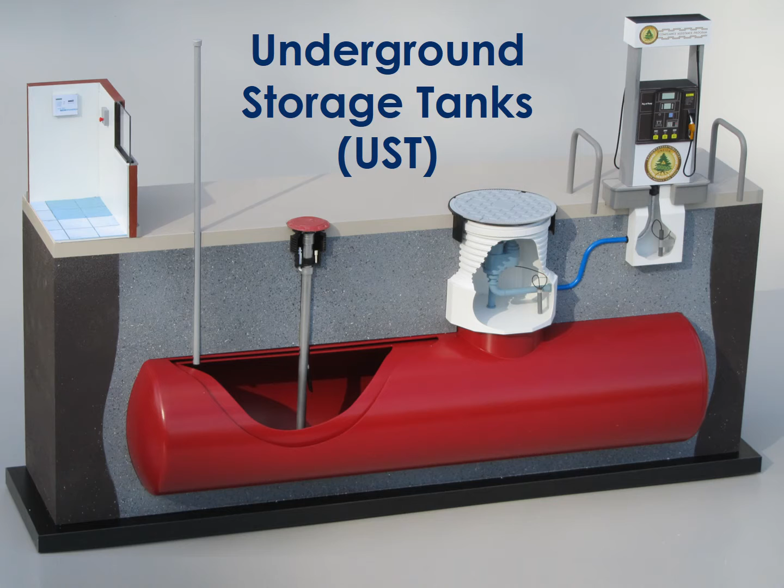A UST facility consists of many components that we'll discuss in this training, the most obvious being the tank itself, which most are double-walled, to catch and contain a leak that would otherwise go straight into the ground. For New Hampshire residents, more than 60% of us use groundwater as a source of drinking water, so it's very important that we keep the lands and waters as clean as possible.

The general areas of the UST system start at the fill riser, where product is delivered to the tank, the vent riser, which guides vapors out, and any piping that allows product to be moved from the tank to another destination, like a dispenser at a gas station, for example. A non-dispensing facility would be a heating oil system, where the pipes lead to the boiler room furnace. Regardless of its use, the piping system also consists of one or more containment sumps that allow these components to be accessible at ground level while also containing any leaks that might happen at these locations.

Most UST facilities have a monitoring system. Some are electronic and use sensors that are placed around the tank and the pipes, and they sound off an alarm when something is wrong. The operators would then respond to find out what the alarm is for, do some sort of action to fix the problem, or relay the message to someone that will. We'll discuss all of these in further detail. In this training, we'll also discuss other forms of protection, like corrosion protection. Depending on the equipment at your facility, the compliance rules vary.

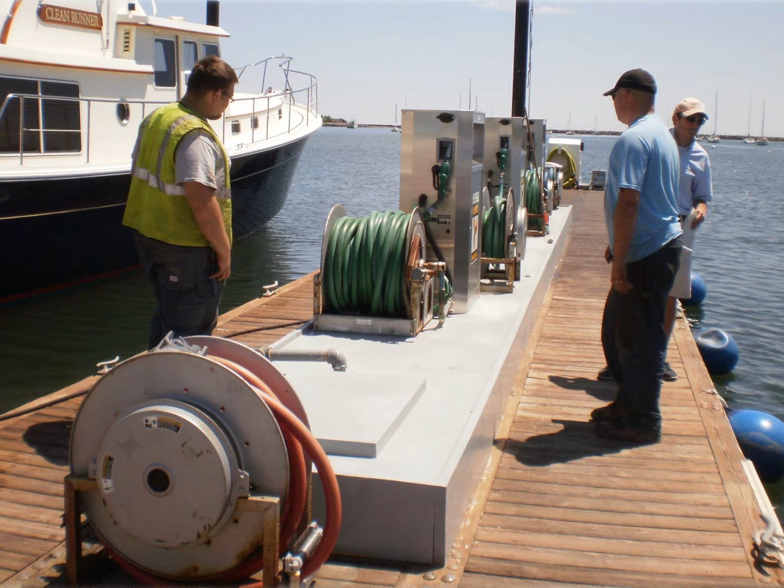To assist owners and operators in the variations across the state, we have split the training into two types of certifications, one for dispensing facilities, like gas stations, airports, and marinas. The other exam offered with this program applies to non-dispensing facilities, like those who use heating oil, like hospitals, schools, corporate buildings, and the like. For those of you who plan to take the non-dispensing exam, you will not be expected to view the vapor recovery presentation. However, all other topics do apply.

The training requirements differ amongst the three classes of operators, so in a moment I'll review each one individually so that you can decide which role fits you and what you need to do after your training, like what documents are needed to meet the requirements. Some documents need to be sent in to NHDES, and others need to be posted at your facility. I'll also review the options for recertification, which must happen within 2 years from your certification date, and in what instance you may have to repeat your training sooner. And lastly, I'll guide you through the basics of inspections. There's a 3-year state inspection, and there's a monthly checklist that must be done by the operators.

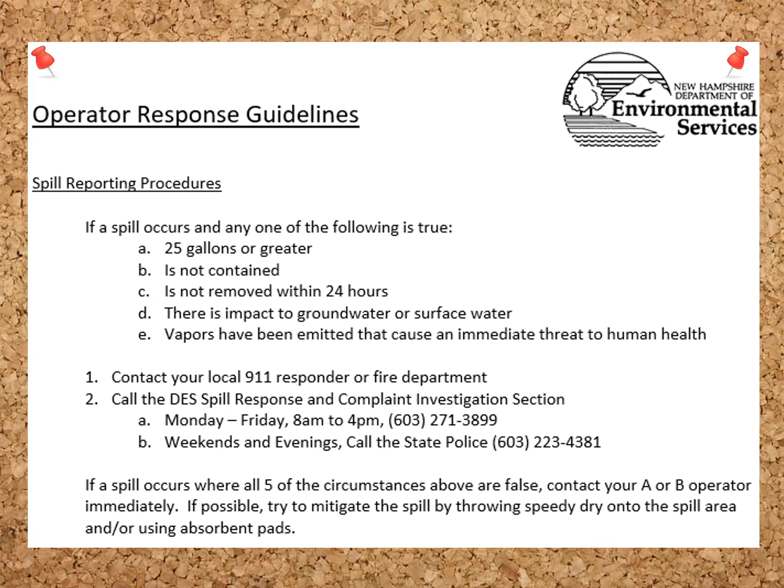Another document that's required for operator training to be posted at your facility is the response guidelines. These vary from one facility to another, so I'll share the basic requirements of what has to be put on the document, and the rest you can write according to your own procedures. The RSA states that this document shall at least include reporting procedures, contact information of who you want your operators to contact in the event of an emergency, and details of how you want them to handle faulty equipment or how to handle an emergency. All of these training-related documents have been made available to you in the materials section of the online test, as well as on our website.

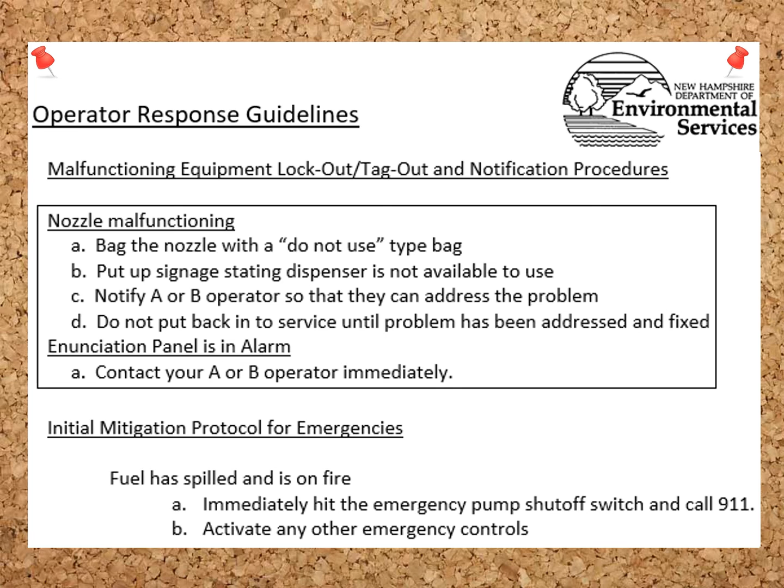Upon passing your training program, your certification will expire in 2 years. This limit applies to all 3 levels of operators. To see what's available for recertifying, look on our website for the most current list of approved training programs and a schedule of upcoming exams or classes.

For those of you who have a good understanding of the UST rules and training requirements, there is an option to take just the recertification exam. Operators must study on their own. This option is only available for operators with facilities that are in compliance. Otherwise, this option will not be allowed. We strongly recommend that you participate in the online option or attend a training session so that you can learn about what has changed over the past 2 years.

If NHDES determines that a facility is not in significant compliance with the applicable state rules and statutes, then we will direct the Class A and B operators to repeat their training. Within 30 days, they would need to be retrained and recertified in accordance with an approved training program, or declare another operator. In either case, a statement of training form must be sent in again.

Federally regulated facilities must be inspected every 3 years. They are witnessed by a state inspector, but are completed by someone of the owner's choosing, either by someone on site or with the assistance of a hired contractor. These inspections are announced beforehand, so you can coordinate your schedule with that of the inspectors.

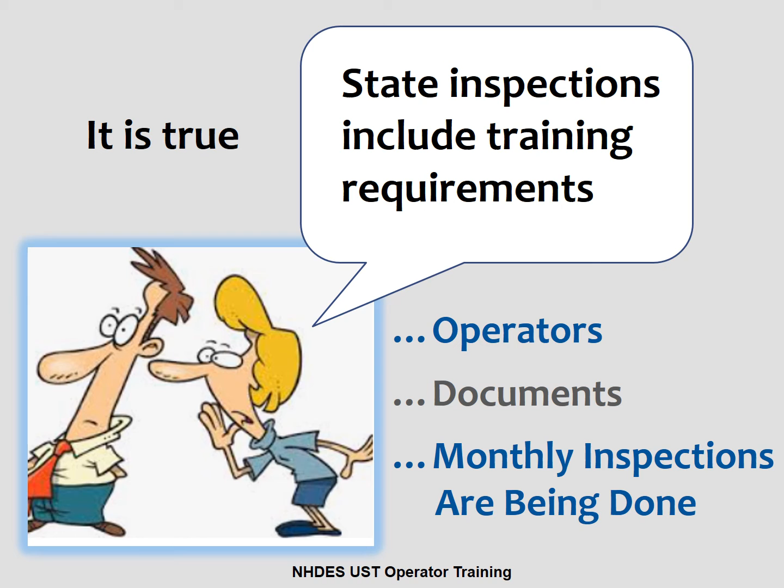Operator training requirements are a part of your facility's compliance. During the state inspection, the inspectors will verify that your operators hold a current certification, that your documents were submitted to us to designate your Class A and B operators, that other documents are posted, like the Class C operators or the spill response guidelines, and the inspectors will review your monthly visual inspections.

This is the monthly visual inspection. It is a 2-page form. It is the responsibility of the Class A and B operators, but they can designate it to someone else and record the names on the form if you do. This does not alleviate the responsibilities of the Class A and B operator, so make sure you are clear about the details in which these inspections are completed. If anything is found wrong during the inspections, record that on the form and have it corrected within 30 days. Make sure you retain these forms for a minimum of 3 years.

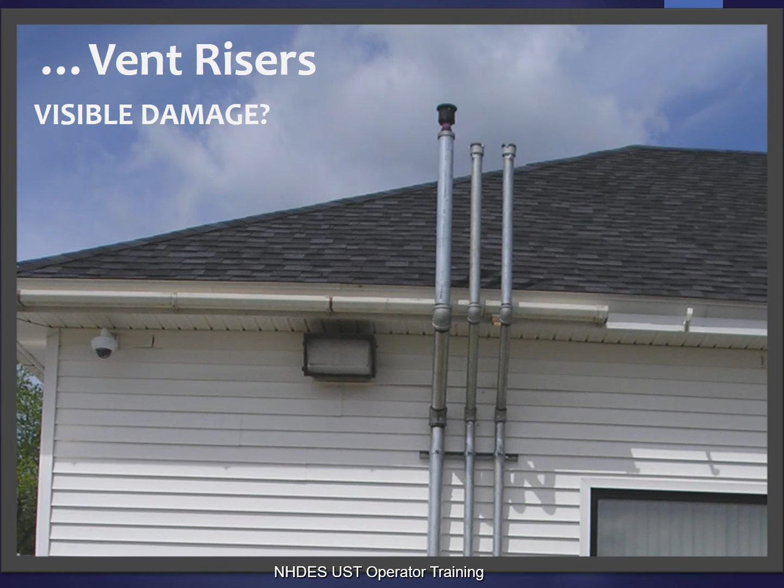Most vent risers are metal pipes above ground, but fiberglass underground. So the riser being bent this far over likely has a break in the fiberglass and would vent flammable vapors out at ground level. Doing your monthly inspections, you can catch obvious issues like this and hopefully prevent a disaster from happening at your facility.

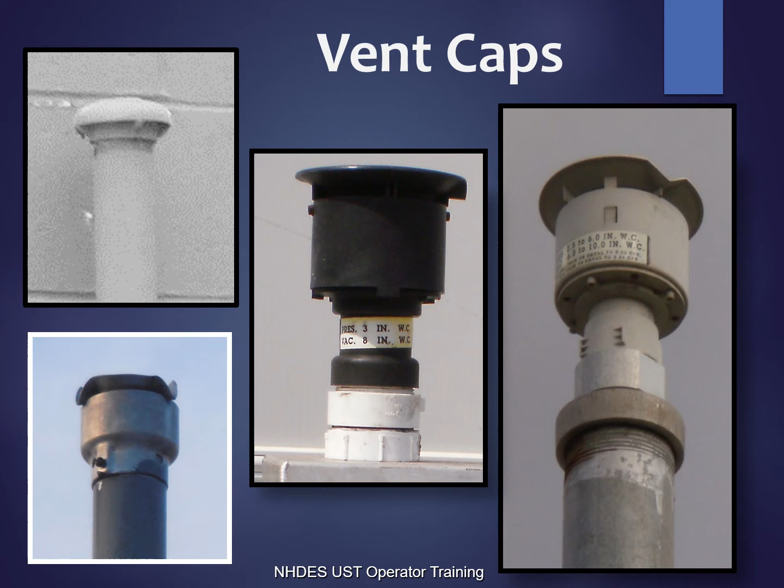These signs can easily be recognized at ground level. When checking your vent caps, you'd be looking for visible damage like the cap on the left, which is missing the top lid. Heavy storms can result in damage like this, so it's important that you have it fixed when you notice it and record the work on your monthly form.

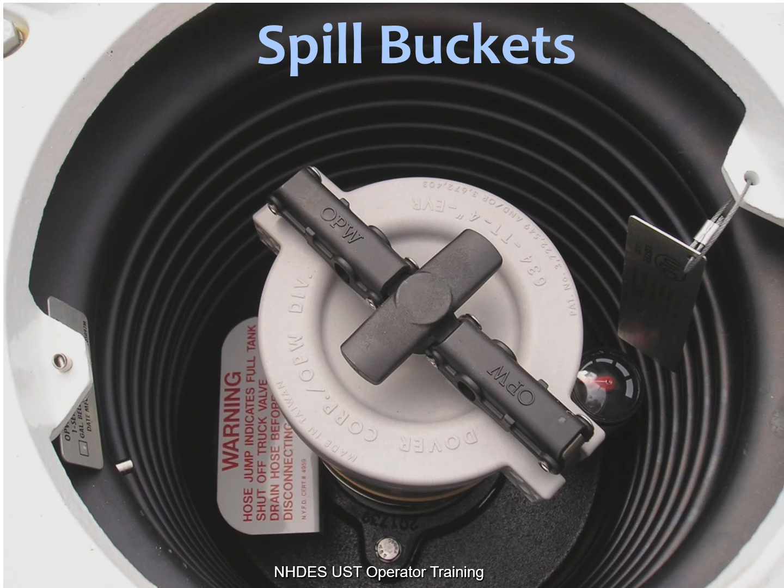As for spill buckets, this is what you'd see when you take off the ground level cover and look down. Underneath the gray cap is the fill riser, where the delivery driver connects their hose to the fill adapter to fill your UST with product. The spill bucket is designed to catch and contain any drips or spills that may happen during the delivery process.

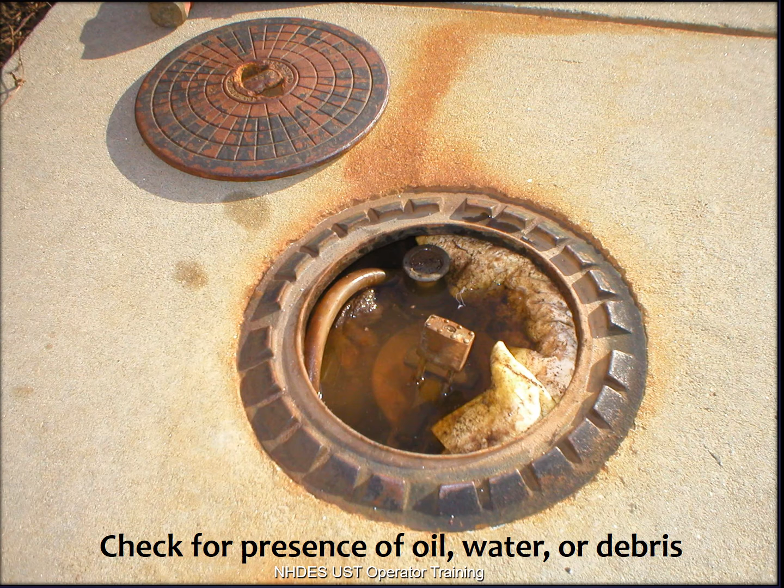Check your spill buckets for the presence of oil, water, or debris. This photo is not what you want to see on your monthly inspections, but if you do, then you'll have to get it cleaned out. Remember to wear gloves when cleaning out spill buckets. Use nitrile gloves instead of latex because they can provide the protection you need against petroleum products.

Do not use a shop vac to take out the liquids. They can spark and could be dangerous to use with mixtures that may contain flammable liquids. You can use a hand pump or a cup and some rags. They'll work equally as good. Please note that the water should not be dumped onto the ground. It must be disposed of properly.

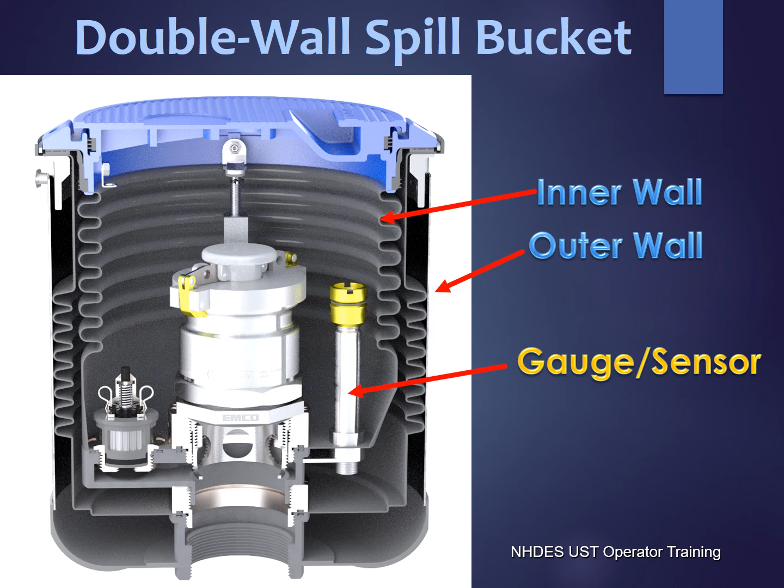This image shows a cross-section of a double-walled spill bucket that shows what it looks like on the inside. You can clearly see the separation of the inner and outer wall and the gauge that would indicate whether there's any liquid in the space between the double walls. More and more facilities are installing double-walled spill buckets, so if you have this at your facility, it also needs to be part of your monthly inspection.

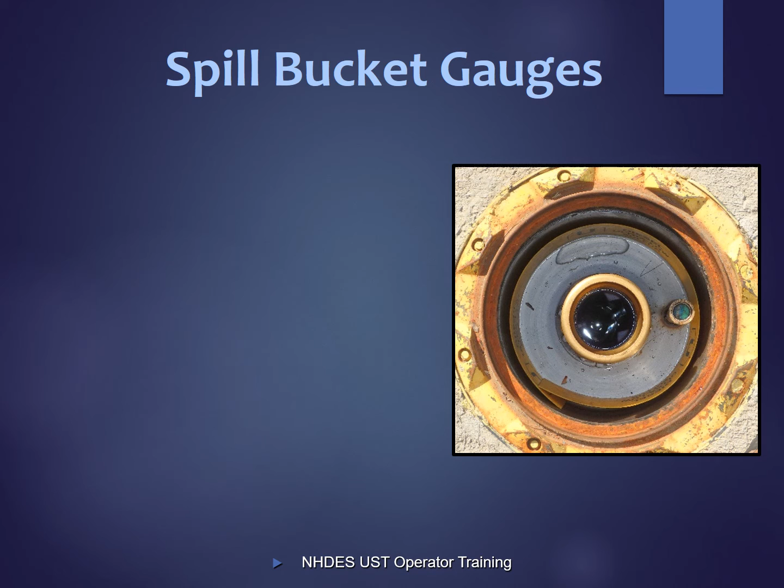Gauges for double-walled spill buckets are located off to the side of the fill riser pipe. Some have color indicators that change from green to red when there's a presence of liquid within the double walls. Others have a simple level gauge to let you know the amount that's in the space of the double walls, if there is any. Whichever you have, keep the dirt off the top so it'll be easy to read the indicator. Double-walled spill buckets with gauges that are not indicating a presence of oil or water, or electronic sensors that are not in alarm, would mean that you are potentially exempt from the triennial tightness testing requirement.

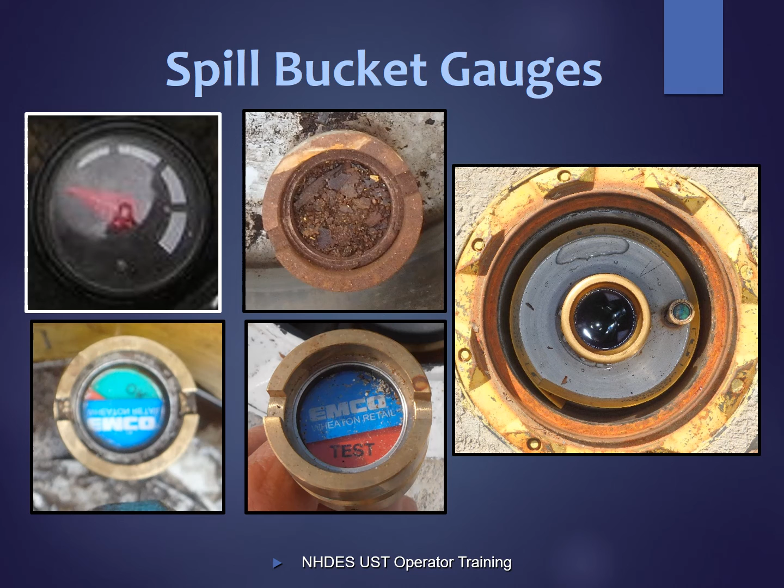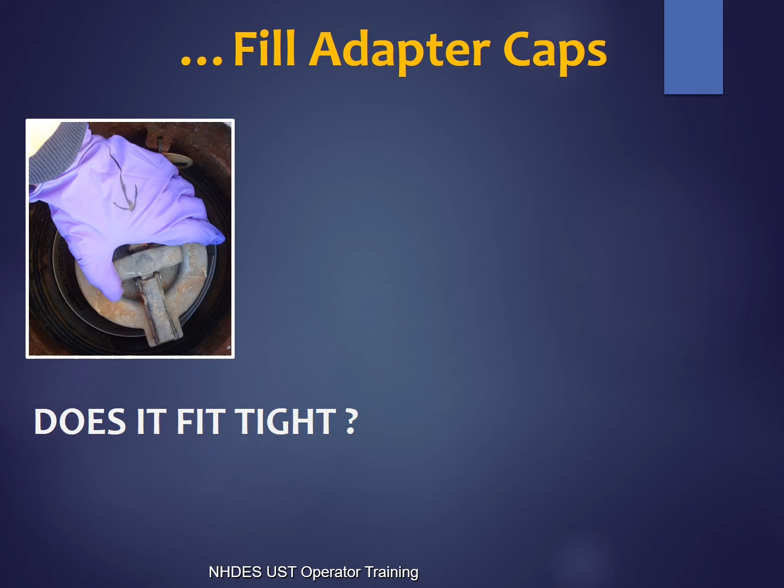When checking your fill adapter cap, first you want to check to make sure that it is a tight fit. Just give the cap a wiggle and make sure it doesn't move freely. Then take the cap off and look underneath to make sure the gasket is there and in good condition. For heating oil, with caps like this, which is smaller, they would thread on, but you could check them just the same.

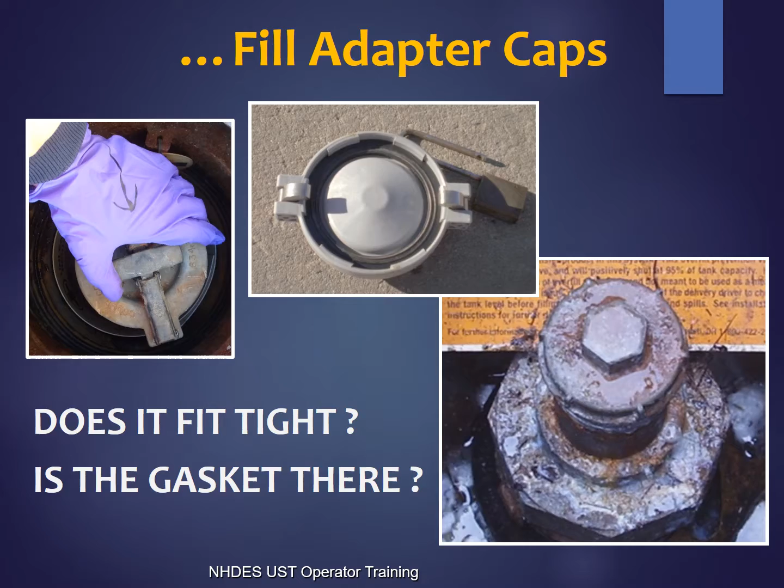Within the spill buckets and under other small ground level covers, the fill adapters are the places where the delivery driver connects their hoses to your UST system. The photo on the left shows a fill adapter, where product would be put into the tank during a delivery. Fill adapters are also connections where vapors can be collected out of the system during a delivery, as shown on the photo on the right.

This is a poppet valve, also known as a dry break adapter. The poppet is a part of the vapor recovery equipment, a requirement at gasoline dispensing facilities, something another presentation will explain. But for the purposes of your monthly inspections, if you have this equipment, you want to give it a wiggle and ensure that it's threaded on tight.

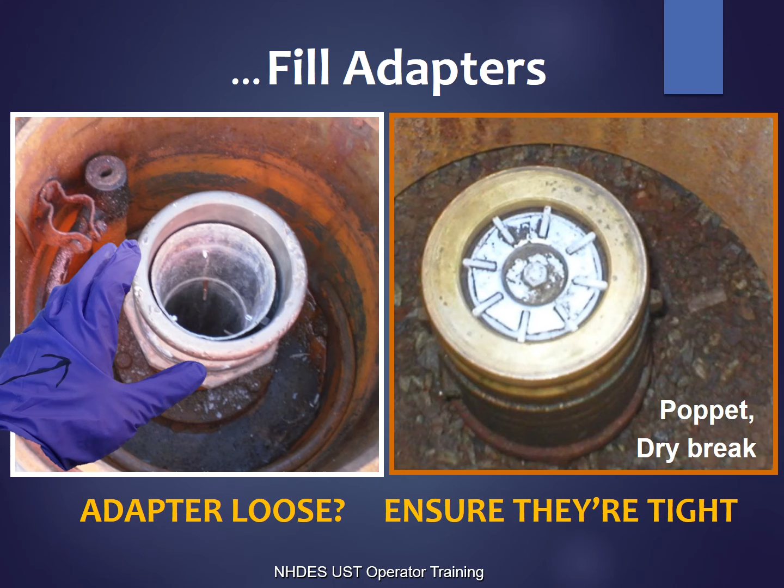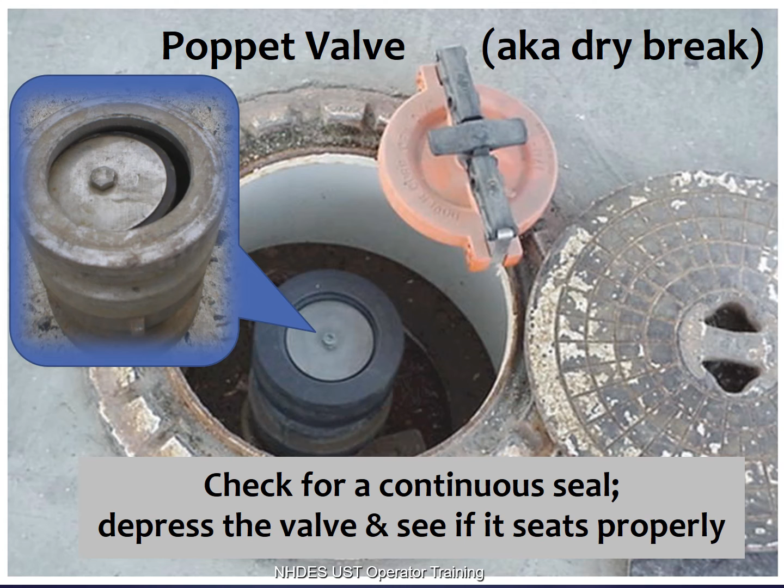When delivery drivers connect their hoses to poppet valves, the elbow connection equipment pushes down on the center of the valve and opens the pathway for vapors to be taken out. During your inspections, check for a continuous seal by pressing down on the center. A puff of air may come out, so try not to breathe it in. What you want to see happen is that it pops back up into place and seats properly. If the spring inside is broken, it will tilt to the side like what's shown on the photo on the left. You can clearly see the valve has a gap and will not contain vapors in the UST systems and could let water in.

Check for obstructions in the drop tube like this. If an inventory stick is left in there, it will interfere with the overfill protection devices installed in the tube. At times, errors can be made, but checking for things like this on a monthly basis, you can catch issues before they become a problem.

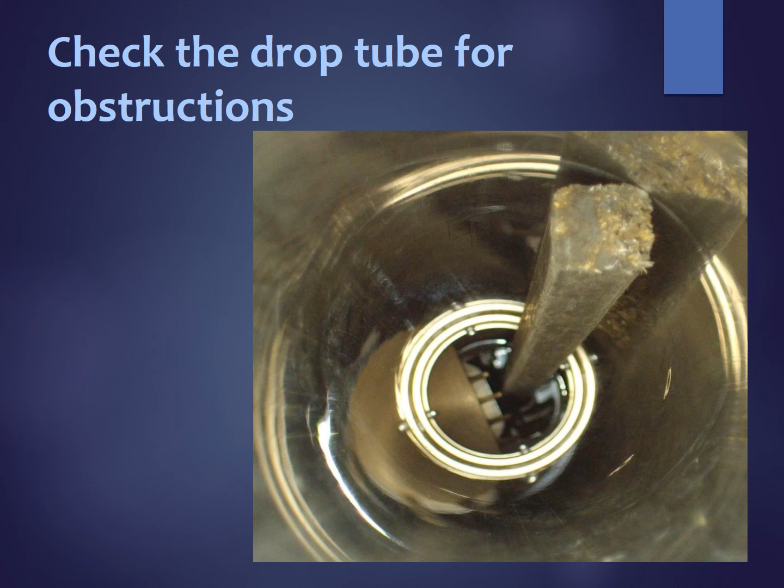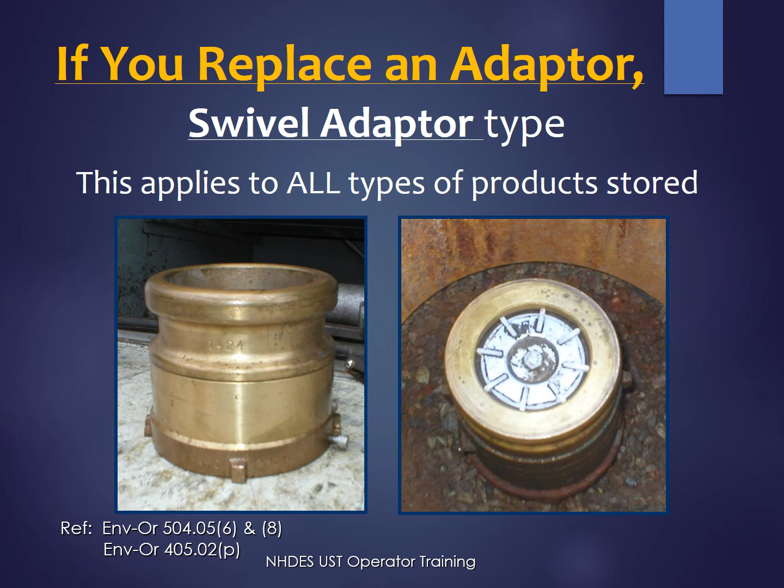At the time of replacing your fill adapter, it is a requirement that it be replaced with a swivel type. This has a top part that turns freely without unthreading the adapter from the riser pipe. This requirement applies to all types of regulated products, so whether you store heating oil, diesel, kerosene, gasoline, etc. With older styles of adapters, they can get unthreaded and wiggle loose over time with the processes of a delivery, as hoses are dragged around and equipment is connected on and off.

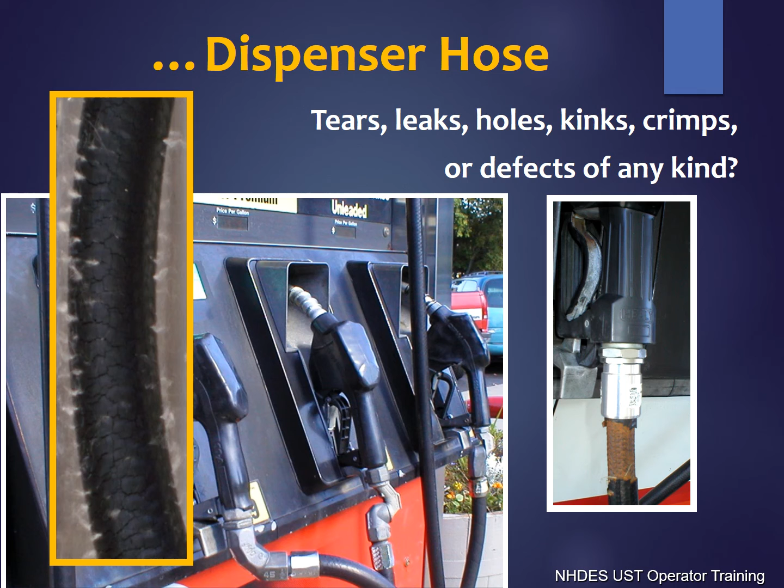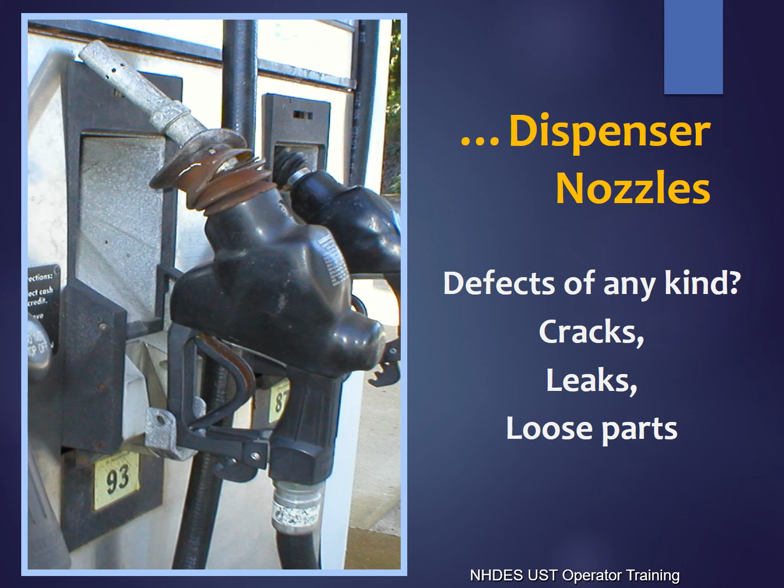Annually, every year, you want to open the covers to your dispensers and look around inside for any signs of leaking, whether water is collecting, or if there's debris. Of course, you would note on the form how you addressed any issues, but definitely make sure you record the date of this annual inspection so that you won't miss the date you need to do it the following year.

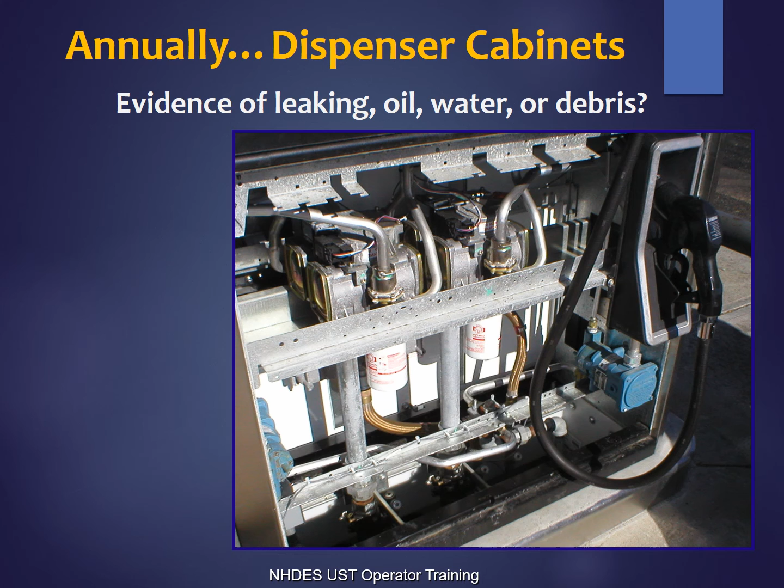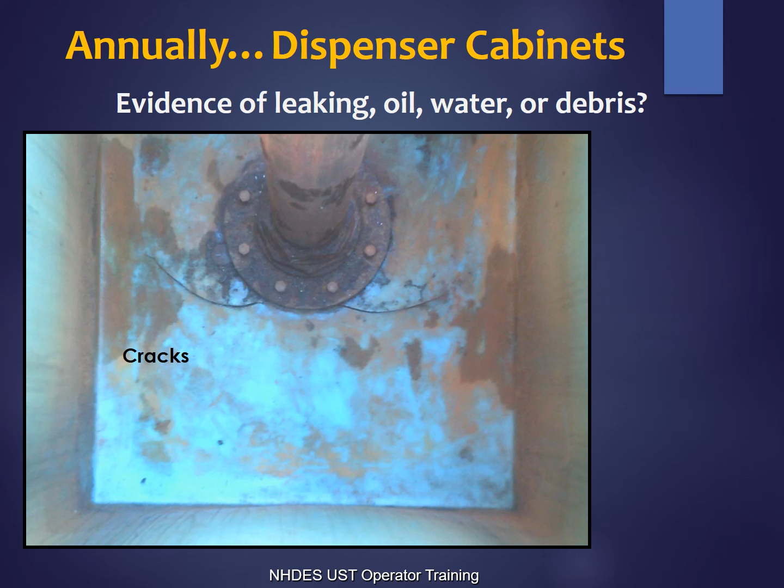When you look down into the containment sumps, where the piping goes underground, look for any cracks in the base and the walls of the sump. These are areas that are designed to catch and contain any leaks at the dispenser, so you certainly wouldn't want any cracks to let out product or let in any groundwater that could corrode the metal parts of your dispenser, causing you to have to replace the equipment sooner than you normally would.

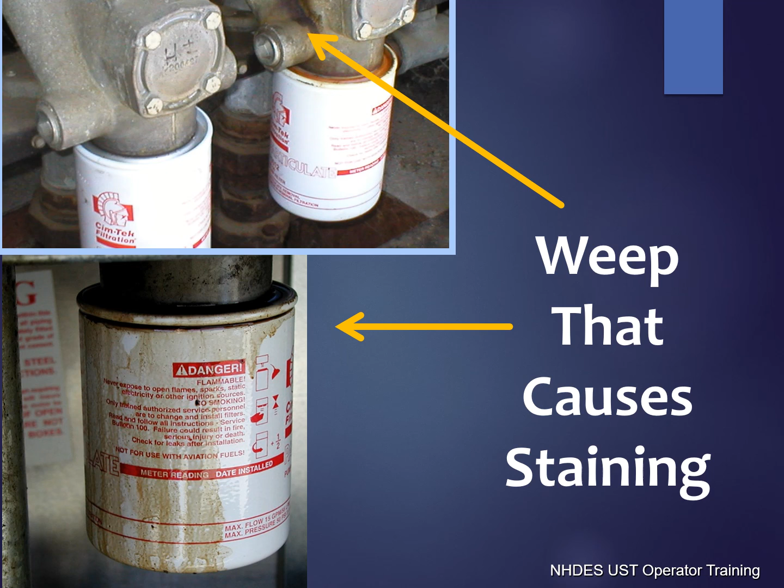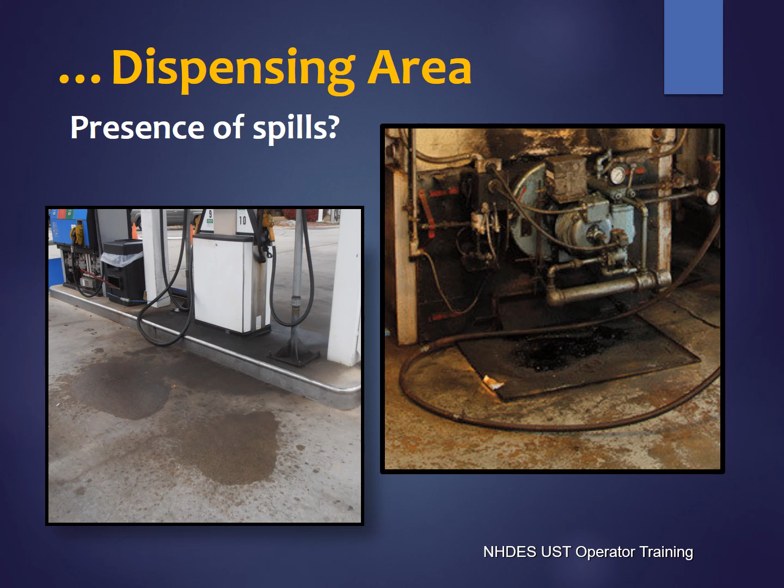If your facility has positive limiting barriers, PLBs, which are the grooves in the pavement designed to catch and contain a spill that happens at ground level, then you don't want to see any cracks because they will not be able to contain any liquid. Also with PLBs, be aware that when replacing hoses, the length of the hose must be considered because they cannot extend beyond the barrier.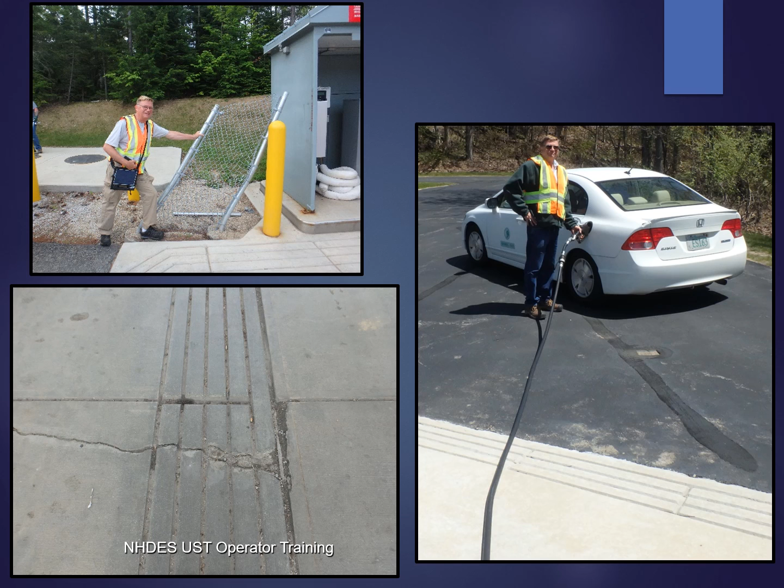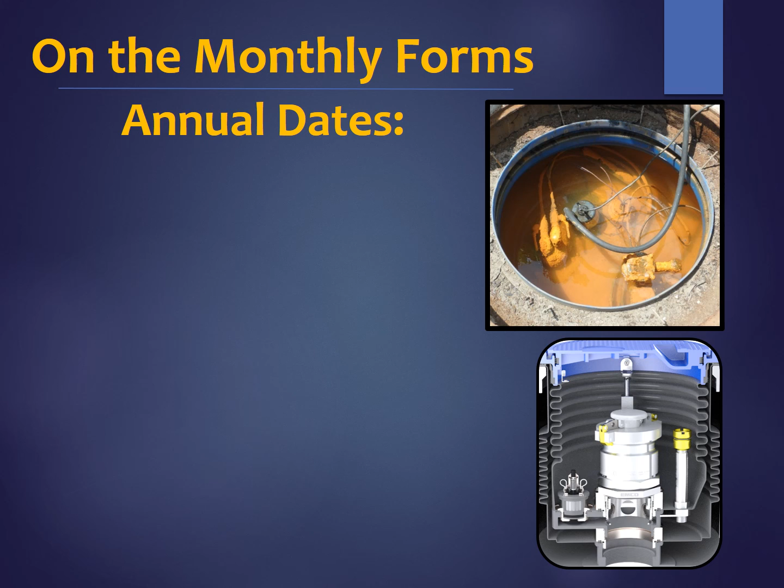There are additions to the new monthly inspection forms. Now you can record the date of things you'd check on an annual basis. These include checking the containment sumps once a year, whether piping sumps or dispenser sumps. You'd want to check for leaks and that they are free of liquid, unlike this top photo, which shows the sump full of dirty water; this would have to be addressed.

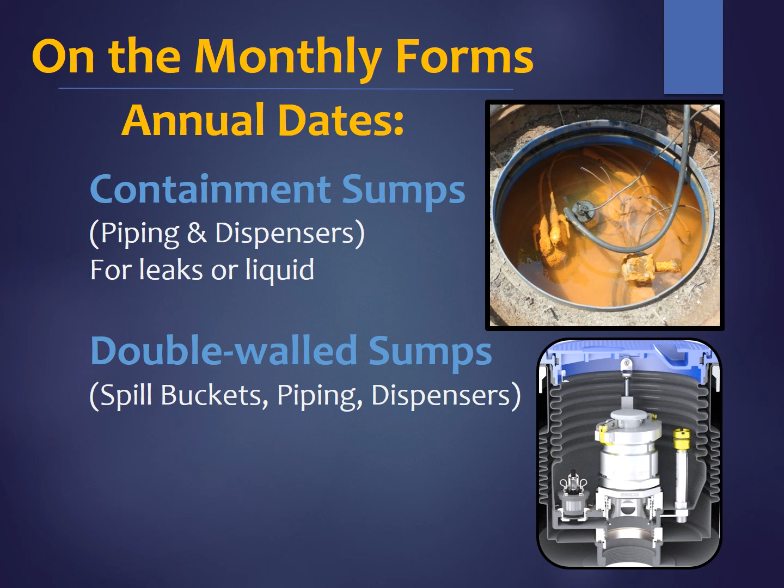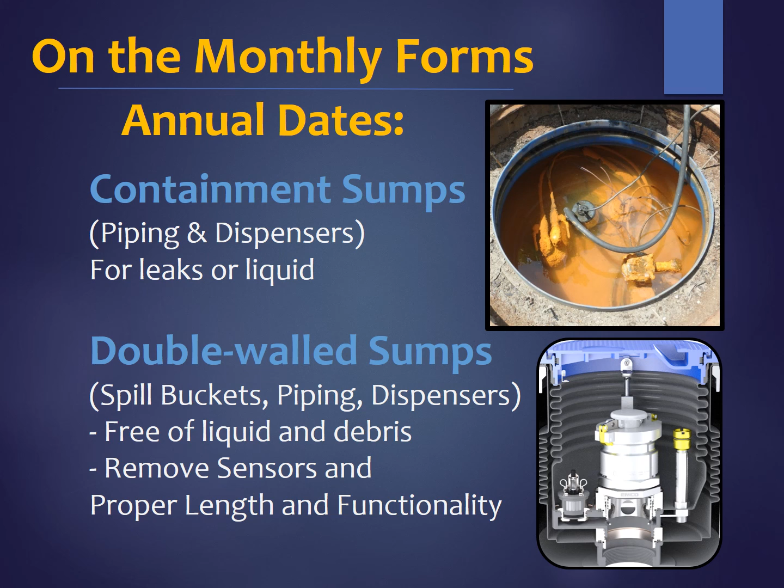For any systems that have double-walled containment sumps, whether spill buckets, piping, or dispenser sumps, you'd check those annually as well to make sure they are free of liquid and that you've removed the sensors within the interstitial spaces to inspect them for proper length and functionality. Be sure to carry these dates to future monthly forms so that you'll know when the next annual inspection approaches.